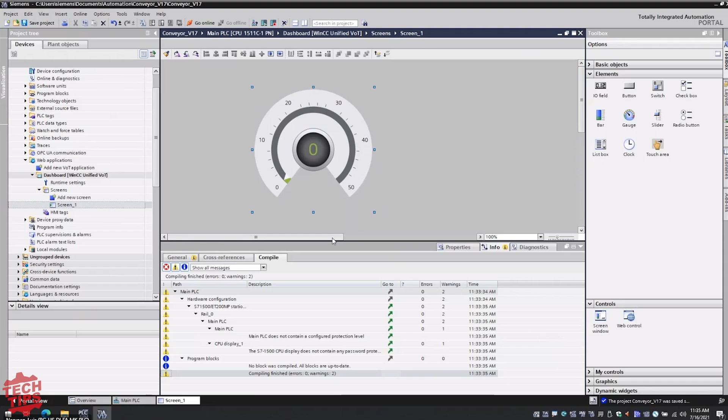To illustrate, I'm going to just drop in a gauge. The nice thing is this is all SVG, scalable vector graphics. So even if I have different, it's resolution independent. So depending on what browser I'm using or what the resolution on my screen is, the objects will adapt to the browser settings.

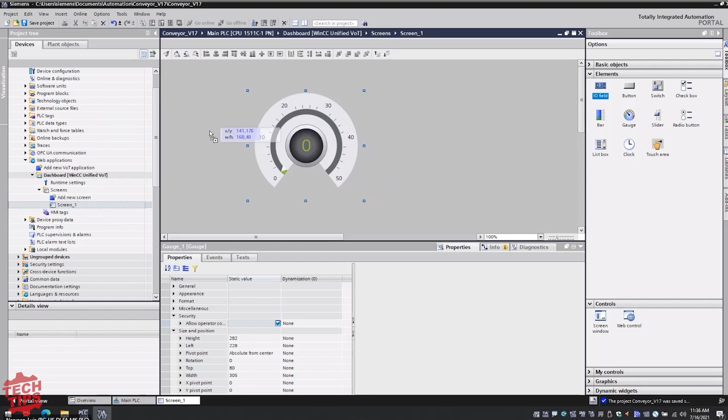So even if I'm on a smartphone, for example, I'm going to add an IO field, and let's put a text box above that, and let's change this text to output. So it's kind of redundant, but I guess it doesn't really matter. All right, so how do I add a tag to these objects?

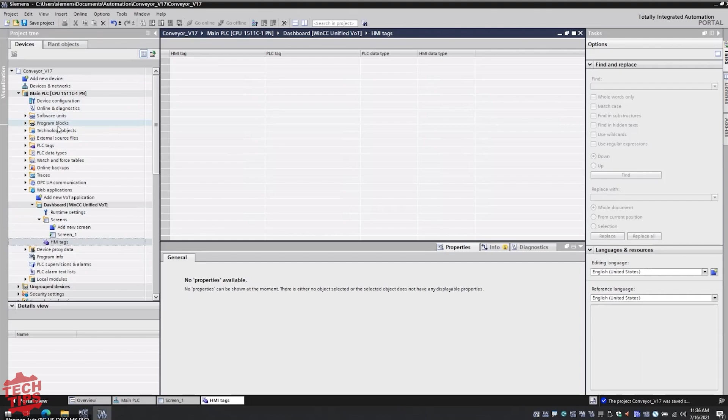So there's several ways. I have an HMI tag table, and I can browse to my PLC tags from here. But I'm going to go to my screen, and in my program blocks folder in my PLC, I've already got a program set up here. All it is just a sine wave function generator. It's nothing fancy.

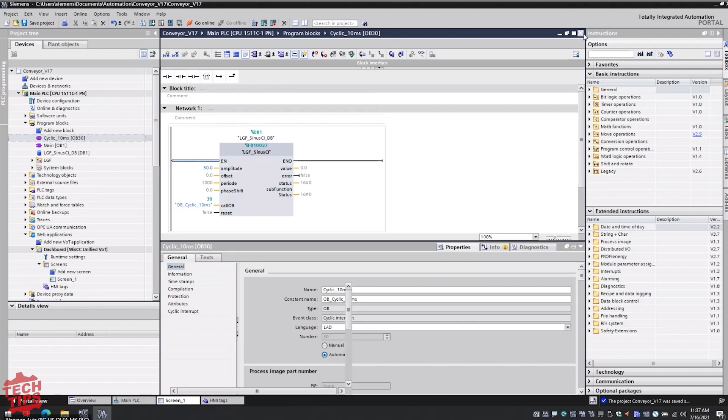And with that sine wave function block, there's always an instance data block, and with the data block, I can use those tags there. So I'm just going to take my value tag from my data block and drop it on the object. Nice. So I've dropped it onto this gauge. I'm going to drop it on this IO field. Actually, maybe I should just rename that to value.

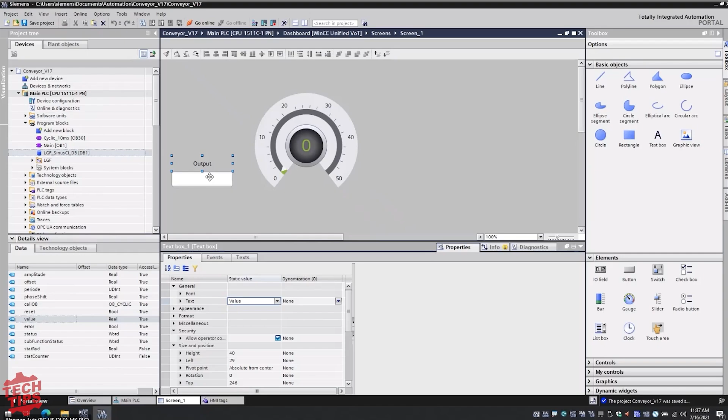And now we're ready to download this, right? And that's it. So we've got our application running.

Now, it's not just the PLCs that are getting smarter. It seems like everything in our control panel is getting more and more features. Even the motor starters. Take Siemens SIMOCODE, for instance, as described by Mark Berger in this clip.

And I know a few major applications out there that are looking for data right down to the IO point. But what we have here really is just an overload relay protecting the motor. And yes, you may have a sealing circuit or a contactor telling you that the 3 phases are pulled in and saying that it's running.

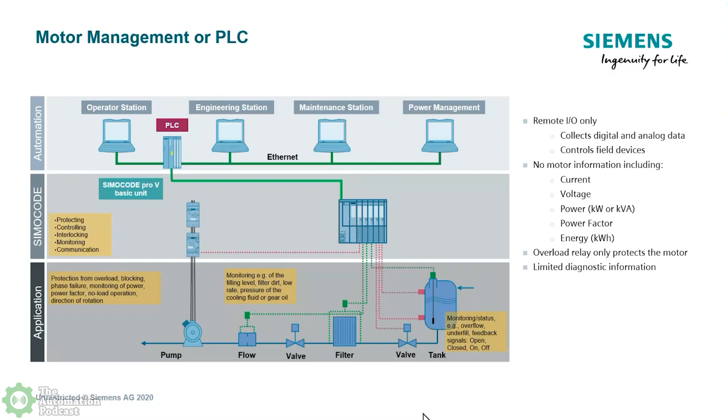But then, of course, you see the flow, so that tells you that the pump's operating and there's no coupler problem between the motor and the pump. And then you have a delta P, and that's coming in, but it's going to all this IO that's out there. Now, if I introduce the SIMOCODE, what can it give us?

It's going to take over all that IO. And again, I'm kind of pushing this to the SIMOCODE's limits. It's reaching that with an analog module, so I can see the flows coming in. Again, we're not controlling them because it's a cross-the-line starter. And then I'm able to see the delta P.

And then I put a digital module, and now I can see the digital ins of the tanks, and I can do an output to that valve to open or close. And now the SIMOCODE is taking care of that entire application directly. And now it would be able to do a standalone if it needed, or it can continue to contact the PLC and give all the information that's going on there in that application.

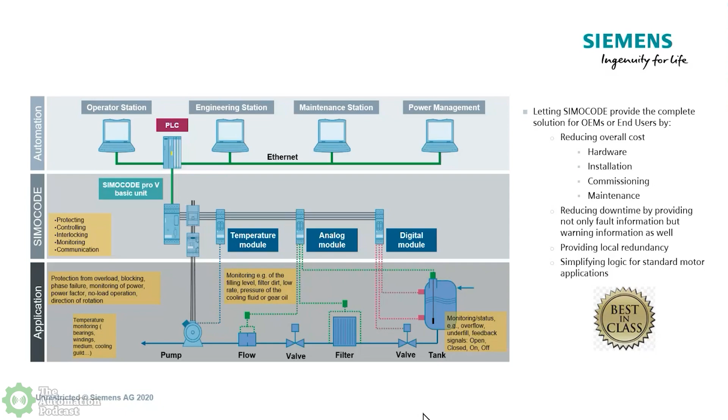And then one last extension of that is the safety factor. So we can do safety depending on your application, but we can do any of the safety that is required with your plant. If you're using the safety specifications for SIL, safety integrity level, SIL level 1, 2, or 3, or if you're using the specification for performance level A, B, C, and D. I'm able to do that locally and with third-party PLCs, or with a Siemens safety PLC, we can do PROFIsafe.

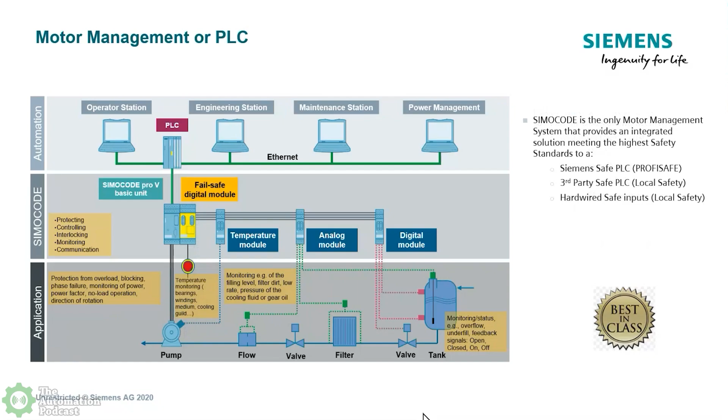Now, all these new features are great, but to actually utilize them, you need the device to speak the same protocol you're currently using in your control system, and that's one place I'm seeing a very promising trend.

Several companies are now producing products that speak multiple protocols right out of the box, with no modification and no gateways. It could be distributed I/O, a VFD, a weight scale, a signal conditioner, or even a compressed air management system, as seen in these clips from the Automation Podcast.

We also introduced a new interface module. We call it the multi-fieldbus interface module. We released this interface module that is capable of communicating in Ethernet IP, Modbus TCP, or Profinet. The benefit of our drives is that you can switch between Ethernet IP and Profinet with just one parameter change.

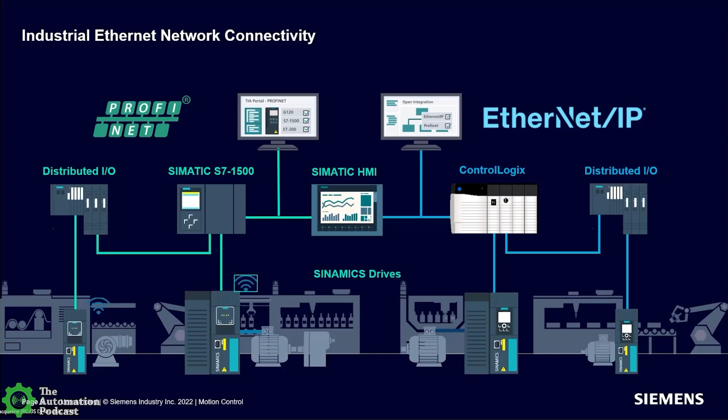On this slide, I have a bunch of different Siemens products, including our HMI, our PLC, our IO, as well as our drives. And they're connected on both Profinet as well as Ethernet IP.

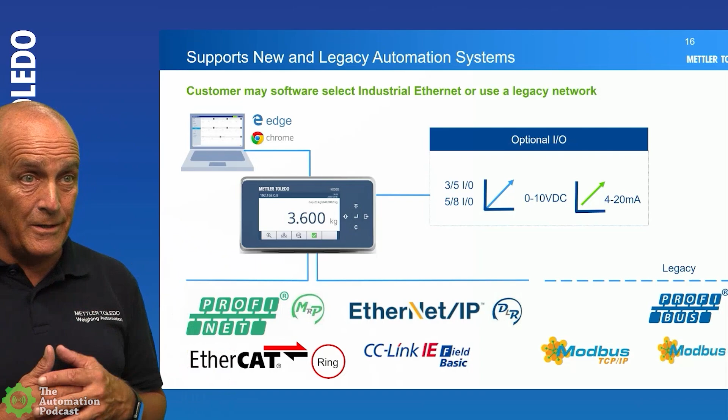Here's my favorite slide in the presentation. Not only do you get the web interface, but you get an automation interface. So we connect to Profinet, we connect to EtherCAT, we connect to Ethernet IP, CC-Link IE, Modbus TCP, and Modbus RTU, and Profibus DP. All those interfaces are certified.

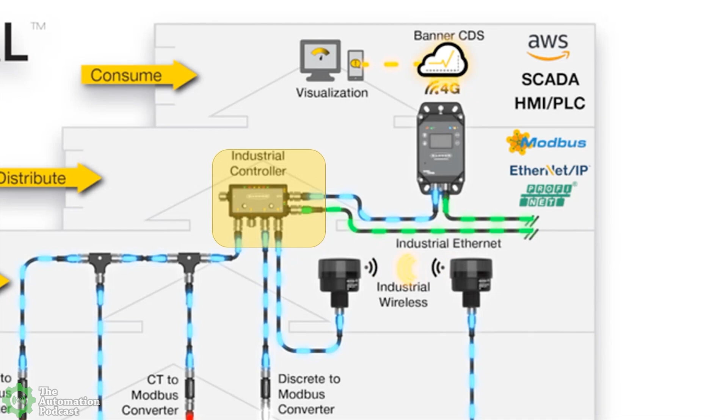The DXM R90 industrial controller is what you see here. You push that data from all these different sensors to the cloud, whether that's AWS, for example, or Banner's own cloud, which is called Banner Cloud Data Services. We could also send that data via that second Ethernet port to your PLC or your SCADA. It talks all those industrial languages: Modbus TCP, Ethernet IP, and Profinet.

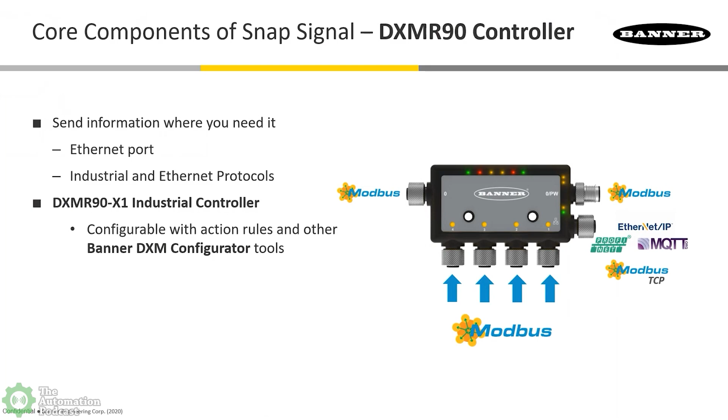Really convenient part for me, as someone who demos this hardware, is the BM40IE device is capable of doing all of the industrial Ethernet outputs: your Profinet, EtherCAT, Ethernet IP, Modbus TCP. You don't need a different device for each of these industrial Ethernet buses. You can just change what bus you want it to operate on from the web server, and you're good to go. You get your ESI file, or your EDS, or your GSDML, whatever matches your bus. You generate that from the web server, put it into your system, and now you're working on a different bus.

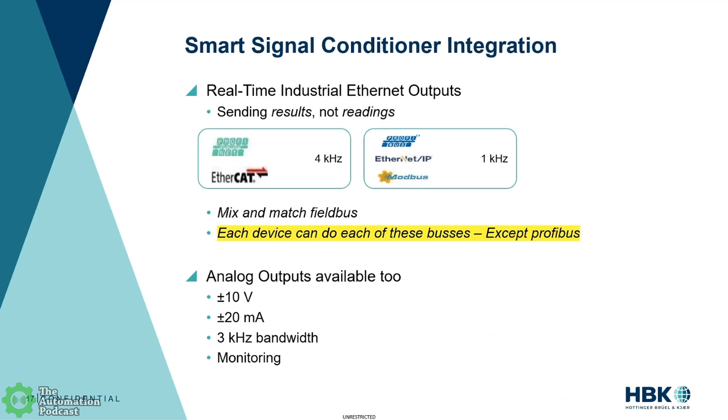Now, I'm not going to argue about the utility of Ethernet, right? Any computer worth its weight comes with a physical Ethernet port, and most electronics have Wi-Fi built in. And man, it is nice not to have to worry about these expensive ISA and PCI expansion cards anymore, or to have to carry around bulky serial converters or fragile PCMCIA cards.

But not every device is suited towards Ethernet. Take a photo-eye or an inductive prox - typically the cost to make those products is one third the price of an Ethernet chipset. So there's a better solution for those simple devices, and that's IO-Link. It's like the USB of industrial automation. And don't take my word for it, though.

Let's hear from Michael Bowne from PI North America in this clip from the Automation Podcast.

For audience who may not be familiar with IO-Link, it's a sensor level communication protocol. It sits below the IO and speaks from what's known as an IO-Link master. An IO-Link master kind of works - I guess you could call it a gateway - but below it, it speaks IO-Link to the sensors and actuators, and above it speaks usually an automation protocol like Profinet, for example. But I should stress that it's fieldbus independent. So IO-Link, even though it lives in PI, we don't place any favorites on IO-Link when using it with Profibus or Profinet, because it also works just as well with every other fieldbus and industrial Ethernet protocol out there.

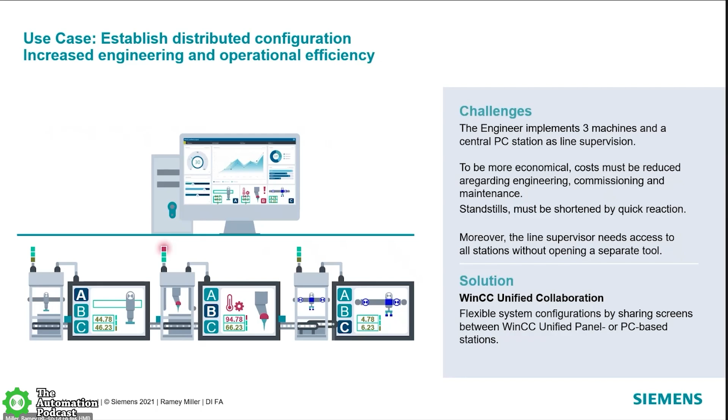Now, there's no denying that investment in robotics has been outpacing all other categories of industrial automation over the last couple of years. Many companies are finding they have new fleets of AMRs and AGVs that they're struggling to keep track of. That's where RTLS comes into play - real-time location systems. Let's hear all about them from Nicole Luther in this clip.

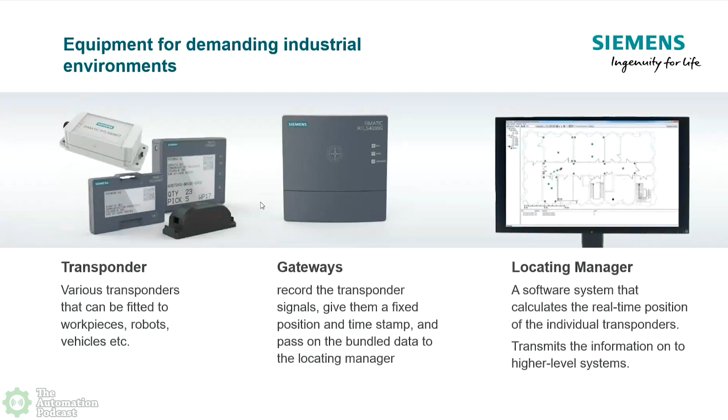What RTLS can really help you with, and help our customers with, is to find things. It's always interesting when I talk to customers how much time they really spend searching for things - very time consuming and long search procedures. They lose their assets, and at the end they have to spend time either producing more or buying more. So it can really help them find and keep track of their inventory.

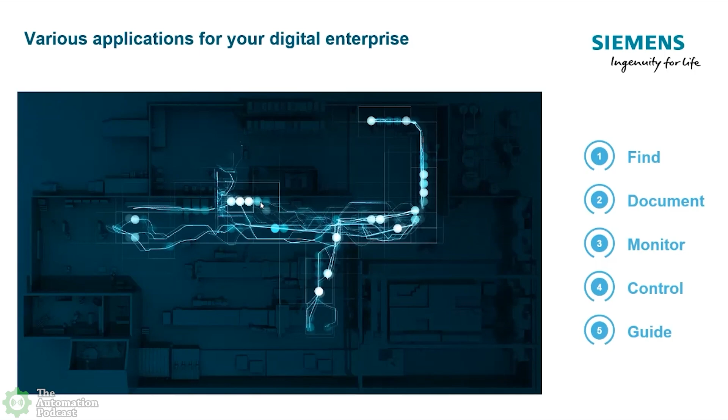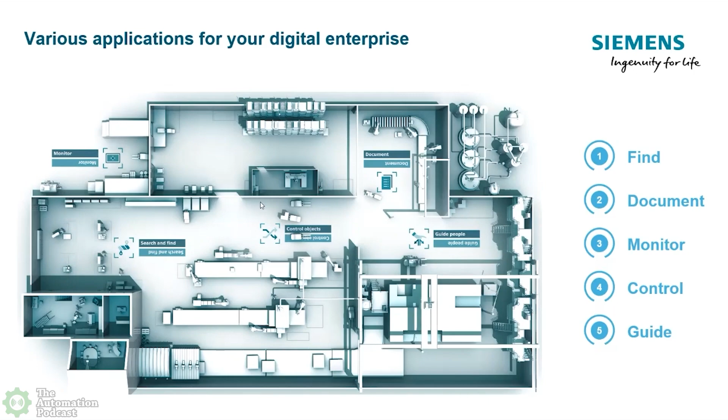And then document everything automatically. Obviously there's still a lot of paper travelers out there, and it can definitely help reduce that - monitor things, get an overview of your logistics procedures, your manufacturing processes, and also control and guide whether it be people, AGVs, or forklifts, as you can see here on the screen. So a huge variety of different applications you can do with RTLS. Another example is AGV locating or forklift locating. There are requests for collision avoidance, of course, when you have high traffic areas with people, forklifts, and AGVs.

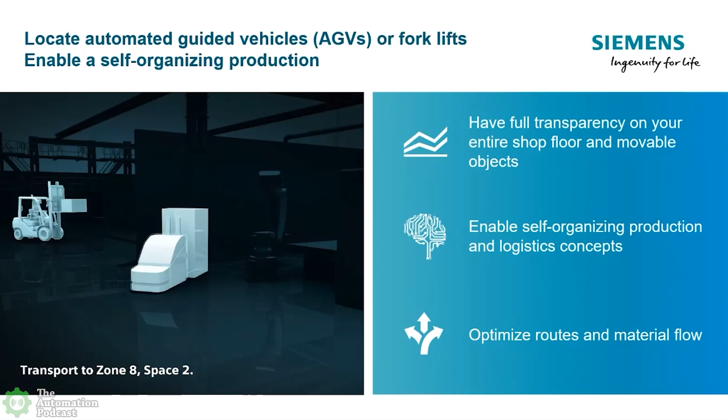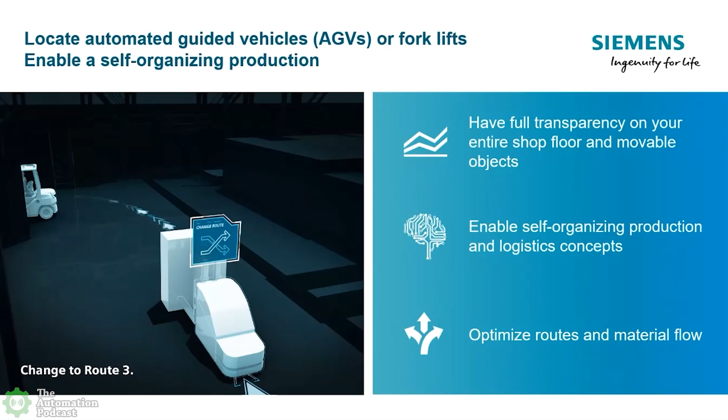So all that, of course, needs to be coordinated in order to avoid accidents, and with the location data, we can provide that information and say, okay, there's a forklift, there's an AGV, they come too close together, we can set an alarm, the system can stop or alarm, whether it be a person or an AGV. But you can also optimize your routes and optimize your material flow.

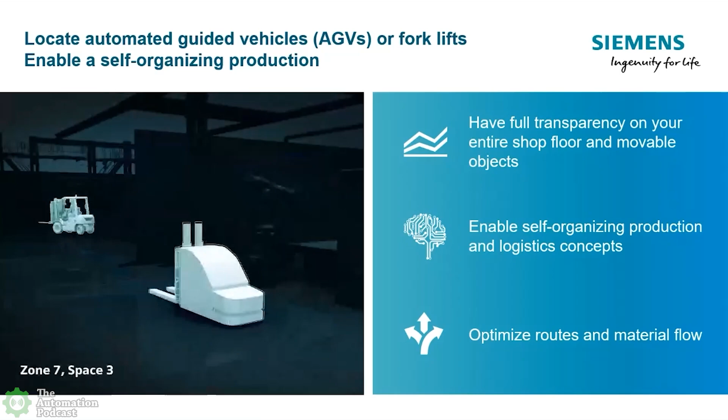With the increasing reliance on fleets of mobile robots, some companies are starting to struggle with the charging needs of these devices, with a third or more of their fleet spending hours each day just charging and not working. Well, one company came up with an ingenious idea to put those charging robots back to work and let them charge while they're working.

We hear about that from Noam Geffen from CaPow in this clip. When you need to deploy also charging, you lose real estate in the warehouse. So you basically have less place to put your products in, and then you suffer from that.

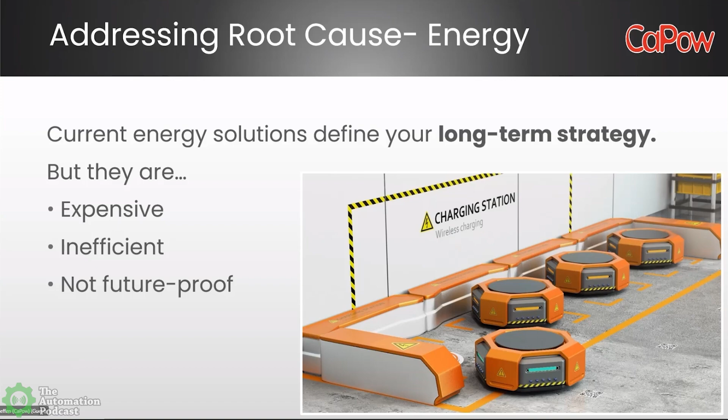And we say, okay, what if in a miraculous way, we could achieve, first of all, a solution that runs 100% of the time for 100% of the fleet. You can actually prolong your entire solution's life cycle while at it, and reduce the cost of ownership. And of course, also, which is something less talked about, disengage the dependencies on traditionally inefficient power solutions. And this is basically where the thought about the CaPow Genesis came from.

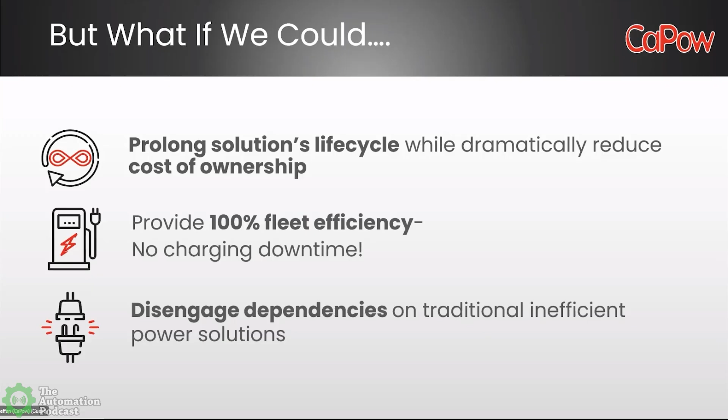And our product is a wireless power delivery ecosystem for moving robots. When I'm saying moving robots, I actually mean that. So our product is basically the only one in the market thus far that we know of that is able to power robots while they're on the go, so while they're in motion. Basically 100% of the fleet works 100% of the time.

And the best thing about it is the solution is completely agnostic to the hardware, to the battery type, and the surface. It means that we can run on every kind of robot - AGVs, AMRs, ASRS solutions, shuttle systems, drones, what have you. We can work with every kind of battery solution that there is today - lead acid, lithium, supercaps, you name it. Let me just explain how this magic happens.

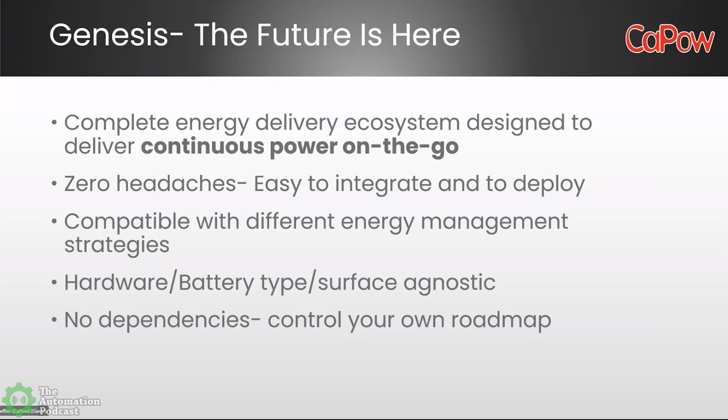So we look at two sides, the robot side and the facility side. On the robot side, we integrate into the robot a small box called the Genesis receiver. The receiver is a very lightweighted device, around 1/10 of the size and the weight of a normal lithium ion battery. It's integrated into the bot in a very smart way so that the battery basically looks at it as a CC/CV charger.

Then on the surface of the robot, may it be on the bottom, on the side, on the top, whatever, we're putting the antennas. An antenna, or in the CaPow lingo, it's called a sticker. It's a very thin and double-shielded aluminum foil, the antenna, which basically receives the power from the facility side system and then distributes it into the robot directly into the rail. Again, not changing anything in the layout.

On the facility side, we put the same kind of a sticker on the floor. It can be completely customized to how the bot looks like. It means it can be narrow, it can be wide, it can be long up to 30 feet, and can be short up to 2 feet.

We even did a very cool application with a drone that basically reads barcodes for inventory inside the warehouse, and then we put this kind of sticker up on the rail, so the drone never needs to land in order to get charged. So it gets charged while it's in midair, and instead of landing every 30 minutes, it lands every 3 months.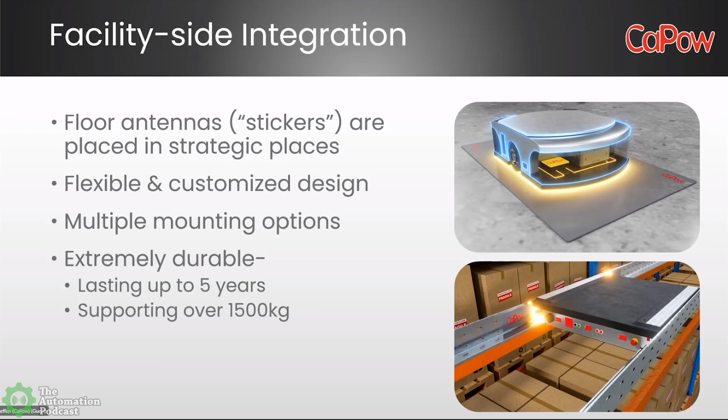It means that if I deliver 500 watts, the nice thing is I only need 120 watts to continue powering the robot as it goes, and the rest goes to charge either the battery or our own SuperCap solution on the robot. It means I'm not just a charging system, I'm a complete power delivery system. So it's both power and charging at the same time.

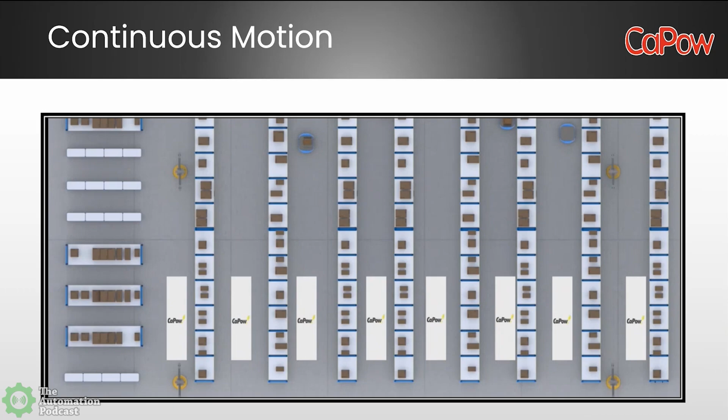Why is that very important? Because if I place those stickers in strategic places in the factory or facility, it means that only a limited number of stickers can power your entire fleet wherever it goes, all the time. And that's the beautiful thing about it.

Aside from the latest developments in AMRs and AGVs, there's also another new breed of robots known as cobots, which are being deployed in a wide array of applications, from welding to machine tending. But with recent advancements in force control technology, they're also being deployed in a brand new range of applications, as we hear about in this clip with Connor Hughes of Flexiv.

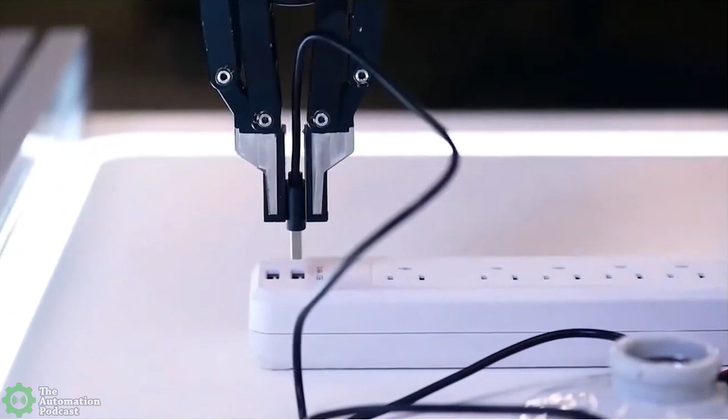Here's a demo of a Flexiv robot and a Flexiv gripper doing a really similar task. You'll see it's going to pick up a USB cable lying randomly on the table, and grasp it gently with the gripper. Then with that gentle hold, it can bump the USB against the edge of the charging strip to reorient it to the right position. It can locate approximately over the port, then come down and gently touch the USB to that port, moving it back and forth slightly until it feels where it's supposed to go, and then insert it the rest of the way.

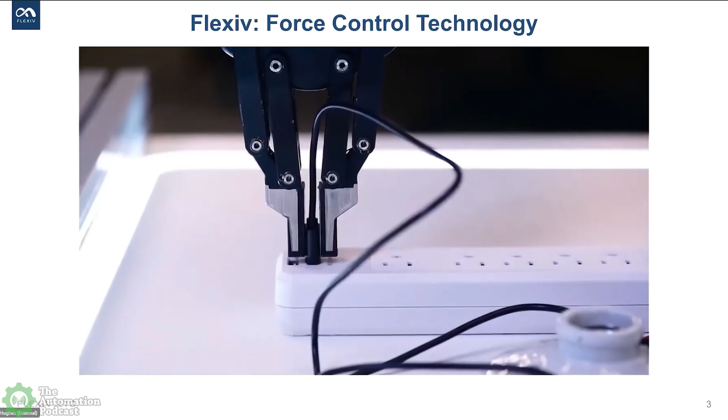So in this video, we have a different sort of application. This is a surface treatment application—we're looking at a buffing head that's polishing a curved surface. These surface treatment applications are really another clear-cut case where force control is super helpful.

What you'll see is this polishing head is going to be guided back and forth over this surface. As that happens, my colleague in the demo video is going to be able to move that surface around, reorient it, and even tilt it back and forth. The robot will continue to follow this path, applying constant pressure to this curved surface, and can achieve the quality of polishing you're hoping for.

So, to come back to this concept of adaptiveness, what we really mean is that we want a robot that is adaptive and needs to be able to handle variation and uncertainty regarding the position of the workpiece or object you're trying to manipulate. In this case, we don't have to tell the robot exactly where this object is that it's trying to polish—we can tell it roughly where it is.

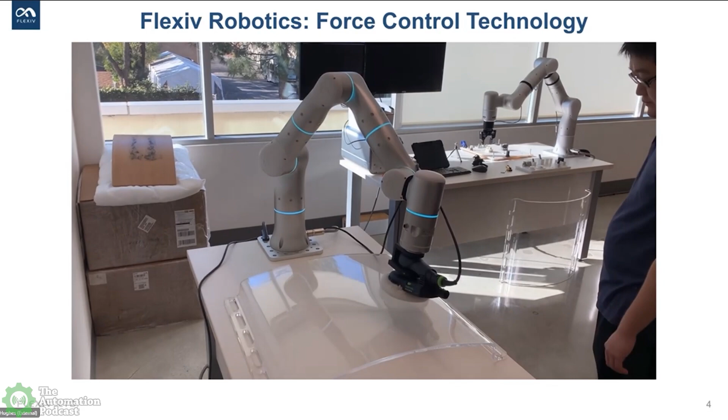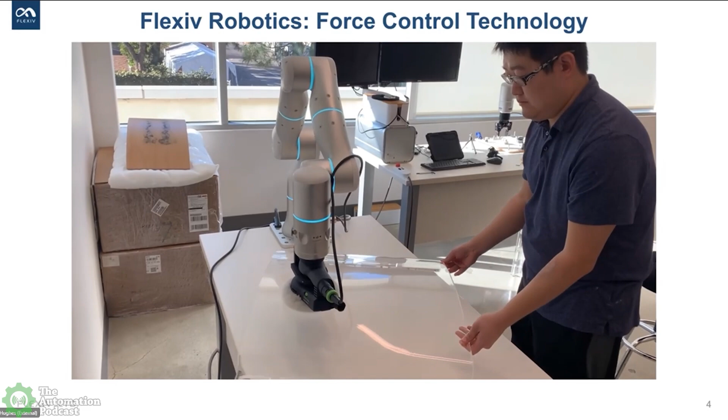Another component of adaptiveness is transferring learning between these different tasks. So if there were small variations, or we had a couple of different types of workpiece that look similar, we don't need to reprogram the whole application to account for these small changes. Again, the robot doesn't need to know the exact shape of the object.

So what it really does here is say, hey, I'm going to try to move downward until the polishing head comes into contact with this curved surface. Then I'm going to try to follow this back and forth motion across this area. And while I do that, I'm going to be in control of how much force I'm going to apply to the environment. That's more or less how we would do the same type of task.

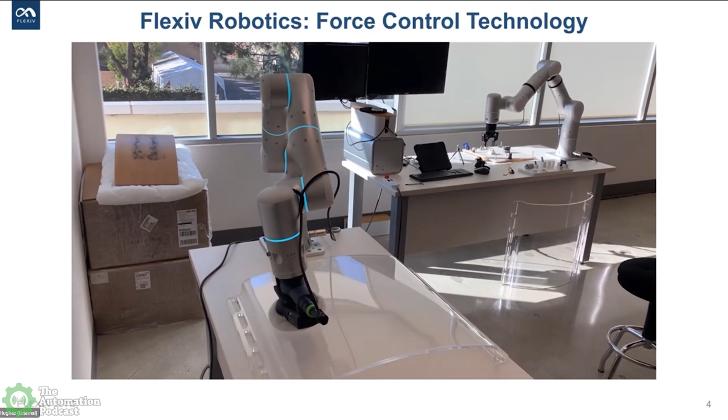You wouldn't need to really look at the CAD yourself before trying to figure out exactly what the curvature is of the object. You just say, hey, I'm going to press gently and steadily against this object and move back and forth along that surface. That's something we can do with a force control robot that enables this adaptiveness. And then lastly, as he moves the object around, this really demonstrates another benefit: disturbance rejection, we would say.

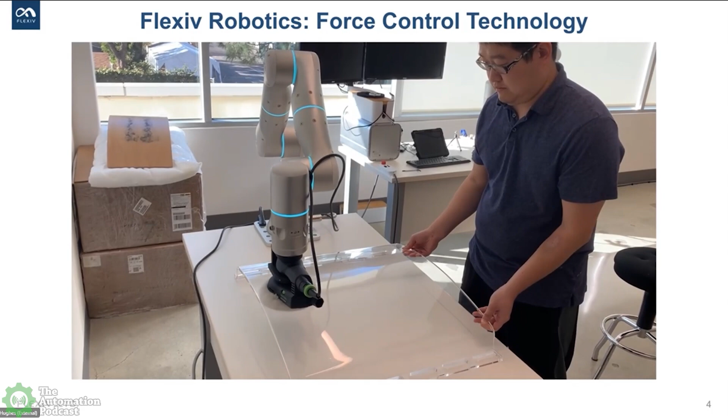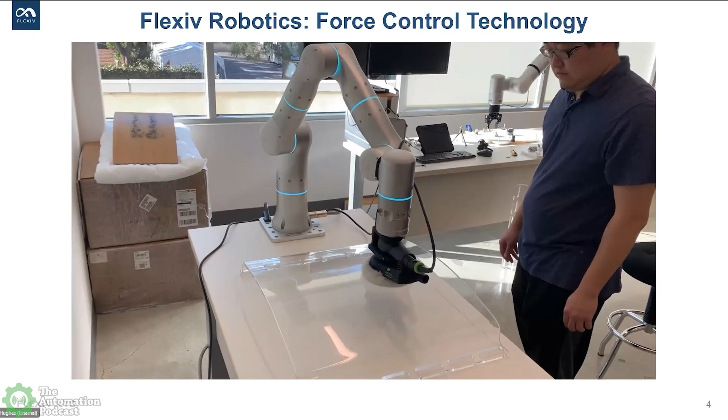So we don't need really perfect fixturing and rigidity, and we don't need to worry too much about things getting bumped or ending up in different spots, because we can use force control to handle these things by making the robot compliant. Using force control, we can make the robot respond to its environment in a way that's not totally rigid. It can continue to gently apply a force to the surface even as it moves.

With all the new robotic applications in our facilities, it didn't take long for the need to arise to have multiple robot arms working in the same area. But with current technology, that typically meant the second robot arm would have to wait outside of the area when the first robot arm was in that area. That meant the second robot arm had greatly reduced efficiency because it was not doing anything while the first robot arm was in the work area. That was until Real-Time Robotics figured out a way to let both robot arms work in the same area without ever colliding. We learn all about that from George Konidaris in this clip.

Our technology enables robots to compute those motions on their own, the same way that you or I generate motion without thinking about it. We never think about where to put our elbow exactly when we're reaching into the fridge. We decide where we want to put our hand, and the rest gets computed. One of the things I'm most excited about is how that's going to change the game in industrial automation.

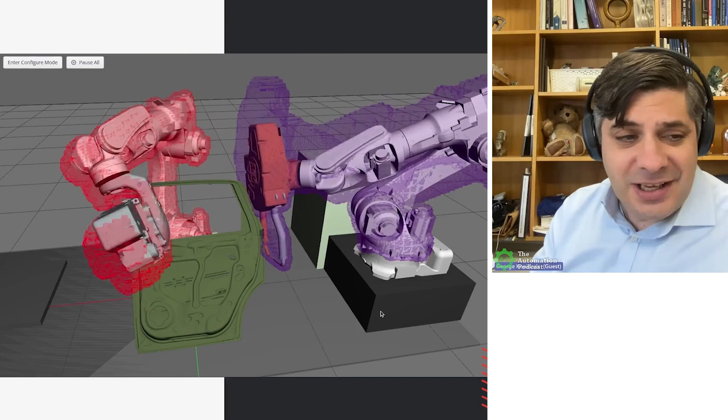At the moment, if you want to automate something with a robot, you essentially have to manually pre-program that robot's entire motion. A human has to do the thinking for the robot about its basic spatial awareness and how it moves through the world. We're changing that. We're going to get it to the point where the robot has a couple of layers of basic physical intelligence, can move around the world by itself, even in the presence of other robots, moving obstacles, or unmodeled obstacles, and just be able to move around without hitting stuff.

Just that basic capability could actually change the way automation happens today. Very often you want multiple robots in the same work cell or workspace, but the way we program that today is you set up interlocks where only one robot is allowed in a volume of space at the same time. A human does all the coordination in advance, watches it happen a couple times, and inevitably is conservative about how the robots can move, because you're not going to be there at runtime, and there's always going to be some process variation.

So what we find is that typically when you deploy two robots, you only get like a 25% throughput boost in something like pick and place. You aren't moving twice as much merchandise in the same amount of time. You're moving 1.25 times as much merchandise because the robots have to wait for each other in this conservative way.

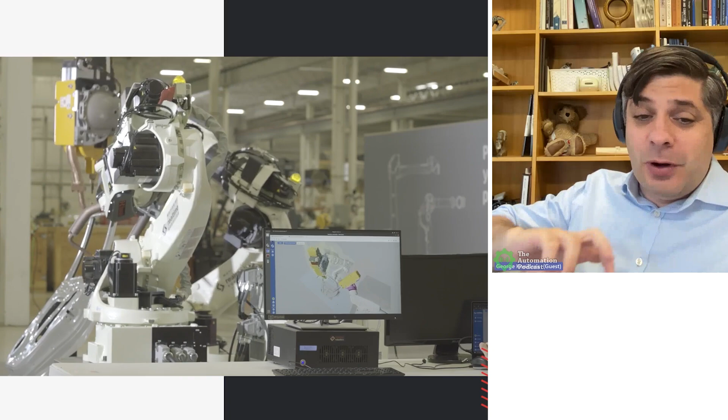But with our system, you just plug all the robots into the same box, and they can very finely move around each other, choosing their motions at runtime. What they actually do is reserve a little bit of space ahead of time, so one robot decides where it's going to go and reserves that motion through space, and the second robot treats that as an obstacle to avoid. We found that it can be more like 1.75 times the throughput.

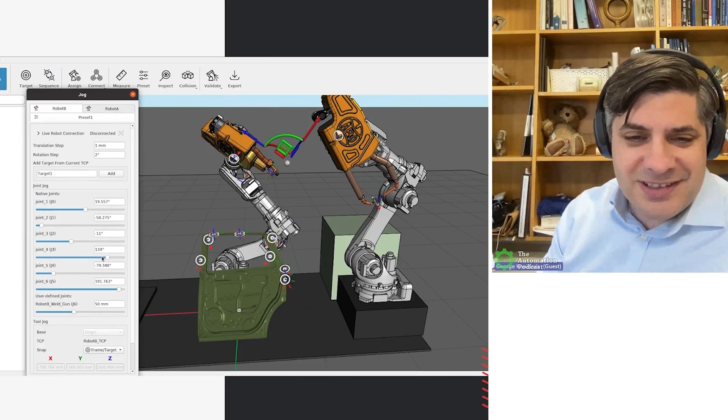So there's a lot retrieved there, but what's even more exciting is you don't have to stop at two robots. We can support up to 16 in the same workspace. There's lots of automation tasks — automotive is the most common one, where you want to maybe weld or put in bolts all over a car chassis. There's a lot of holes and welds you want to make, and moving the chassis around is very expensive and takes a lot of time. So it'd be great to have 12 robots working at the same time, and we can do that seamlessly without any effort on the designer's part.

With hundreds, maybe thousands of new smart devices added to our facilities over the last few years, it can be a daunting task to try to manage all of those configuration files and program files, store them somewhere safe, and then manage the change of them. Who changed what, where, and when, right? Fortunately, companies like Copia are here to help us with that. And in this clip, we learn from Adam Gluck about their new product, DeviceLink.

The amount of code bases, the amount of code running an industrial operation, has multiplied over the years. So whereas this might have been a small pain point before, we're now seeing teams managing fleets and fleets of devices—thousands, sometimes tens of thousands—across their entire global corporate operation. It's a really hard problem to solve. And that's where this tool chain comes in.

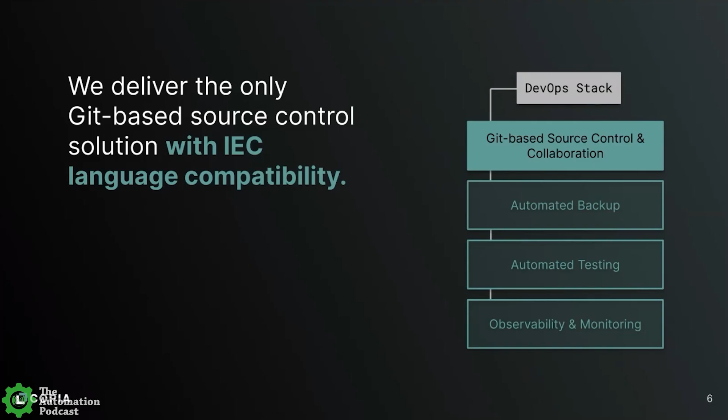But the big thing we're super excited about, that we're talking about here, is DeviceLink. It's kind of funny because you're saying, well, it's not just PLC, it's all these other devices. Actually, when we started with DeviceLink, we called it PLC Link. But as we started talking to customers, we realized the scope of the problem was so broad that we weren't going to be dealing just with PLCs, where our source control product was really focused. Once we got onto DeviceLink, we were really going to focus on a broad set of devices. And what that looks like is, how do you automatically back up these devices?

This really enables you to close the loop between source control and plant floor. Source control prevents you from shipping something that's broken, but DeviceLink and auto backup let you catch it if something does get deployed that's broken. Having these two processes together is really powerful. So DeviceLink is really focused on this—it's our Git-based automatic backup solution.

The goal of this is to bring visibility into industrial change management. If you're talking about those hundreds of devices—and this kept coming up with our customers—people are still pushing changes to them. Even if you have great source control practices, you might have a vendor, a technician, or someone who hasn't been trained yet, or someone who's just in a hurry, end up pushing changes anyway. So even once we got the source control and collaboration piece going, people said, we love this and think it will work, but we still want to catch things in case we mess up. It's a critical piece of the overall process.

Where Copia is strongly differentiated is that the whole source control piece is tied to the backup piece. You're actually in the same space, using the same repositories. Development and plant management end up being able to use the same repositories for understanding what changed. It gives strong visibility into, hey, this is what we think is in production, but this is what's actually in production. Then you can resolve that and figure out what's happening there.

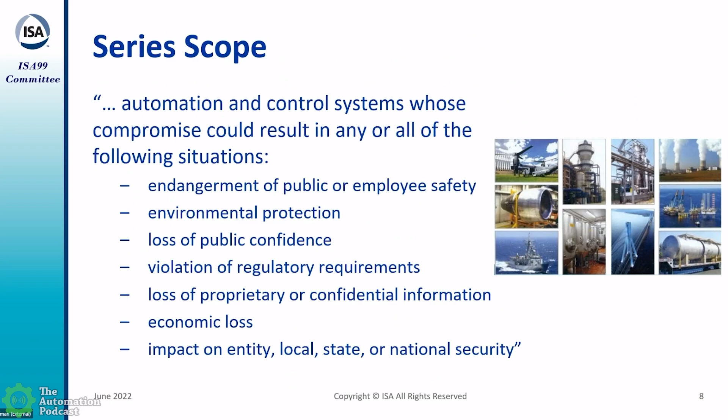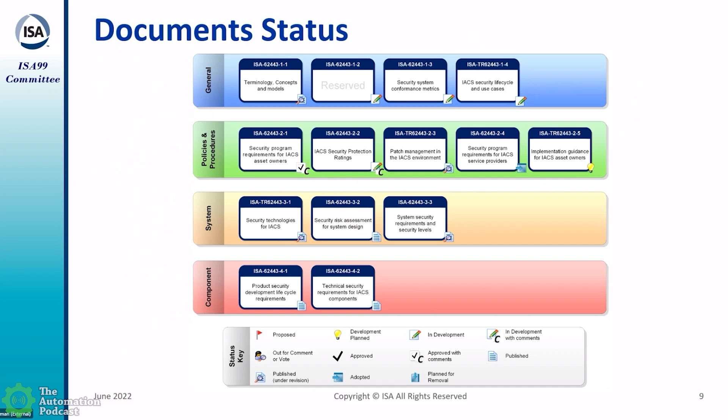Moving down, the second category is the policies and procedures. We all heard about systems consisting of people, process, and technology. This is the people and process tier or group.

The lower two tiers or categories address specific requirements, first at the system level and then at the component level. The first one at the system level is a technical report that we publish and republish from time to time, which is basically a survey of security technologies with commentary on their applicability for industrial control systems.

Then there is standard 3-2, which is devoted specifically to how to do a comprehensive risk assessment for your automation system. And 3-3 talks about the detailed technical requirements for security at the system level.

Then we go down to the component level. Because as you probably know, automation systems are made up of pieces and components from different suppliers and assembled into a solution.

So we have a 4-1 standard, which lays out clearly what a supplier of automation components or systems should have in place to ensure they have a secure development lifecycle.

And then we have 4-2, which basically takes the system level requirements from 3-3 and decomposes them into more detailed requirements for individual components.